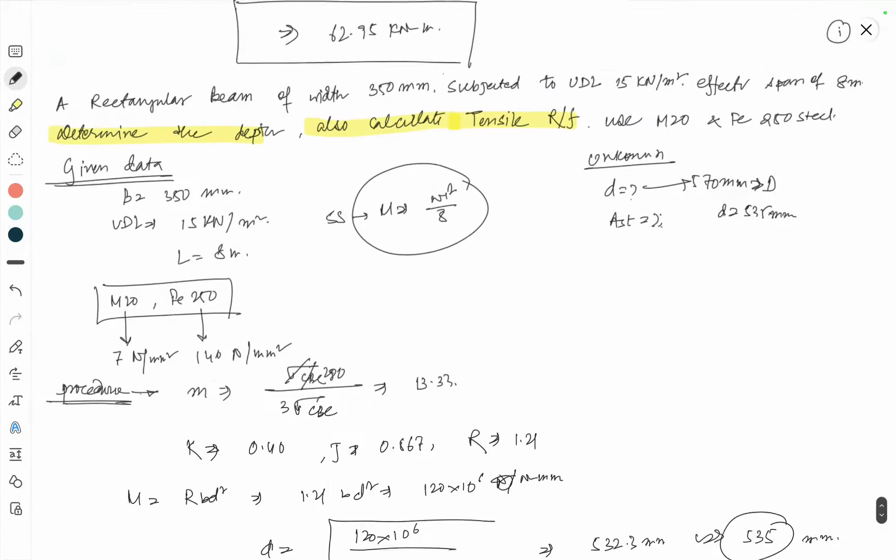From this video, we start shear and bond in our RCC member. In my last few videos, I tried to cover the beam design in WSM method. In case you missed this video, go to the RCC playlist section and find the last video.

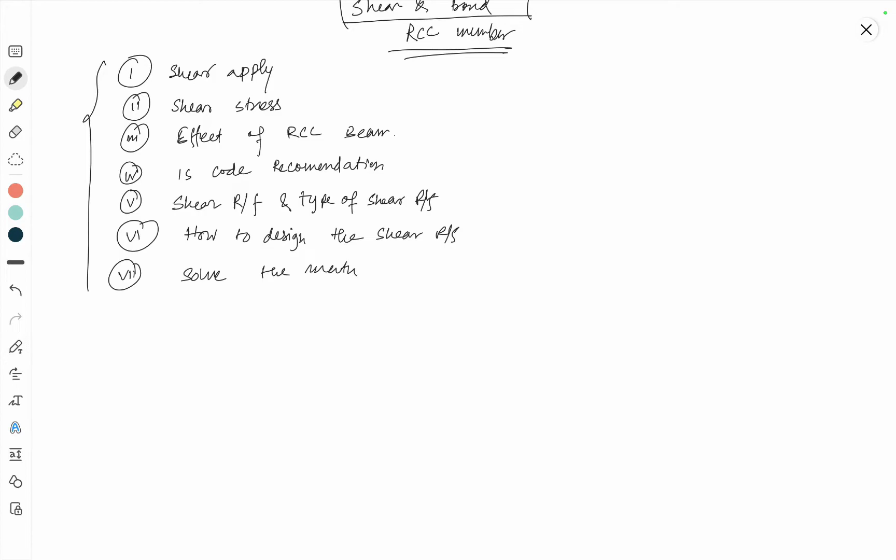So today I start the introduction. How shear comes or is introduced in the RCC beam, or RCC any kind of structure.

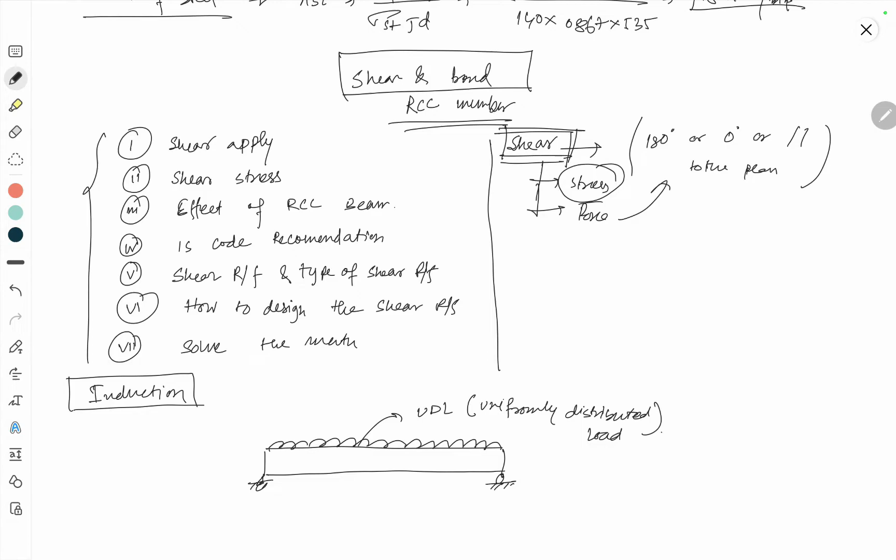So let's assume this is our simple beam. In practical scenario, all kind of force that is called UDL, sometimes UVL, but maximum times it is UDL, that is uniformly distributed load. But one thing I am telling you, what do you mean by shear? Shear means something that is 180 degree to the plane or 0 degree to the plane or parallel to the plane. It may be stress, it may be force. If it is stress, that is 180 degree or 0 degree or parallel to the plane. If it is force, then same, 180 degree or 0 degree or parallel to the plane of action.

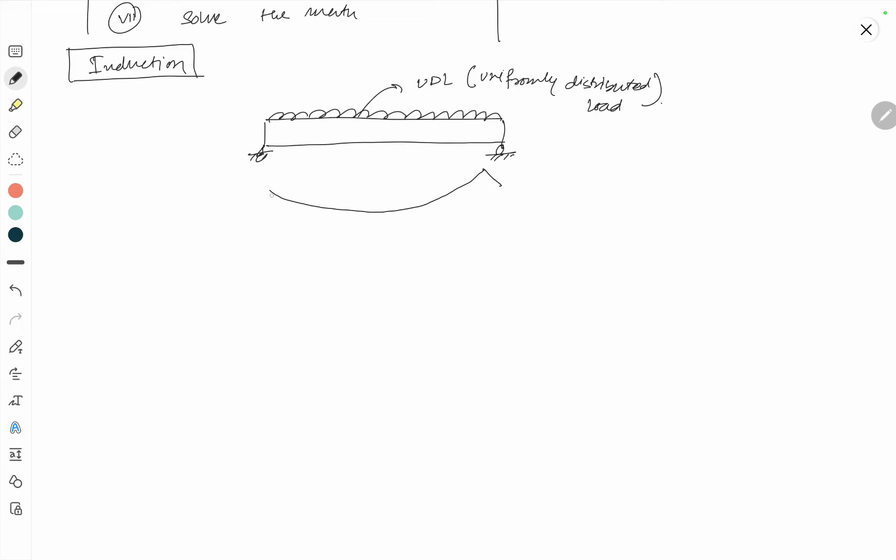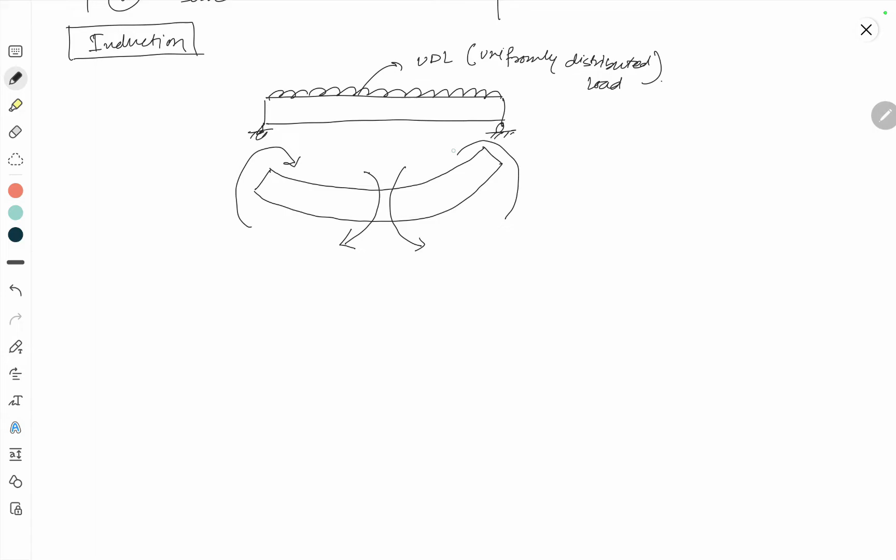So yeah, this is UDL. If this is UDL, then this is your deflection pattern. And if this is your deflection pattern, this is your bending pattern. So in this whole section, bending moment occurs. We know one thing, that dm by dx equals v.

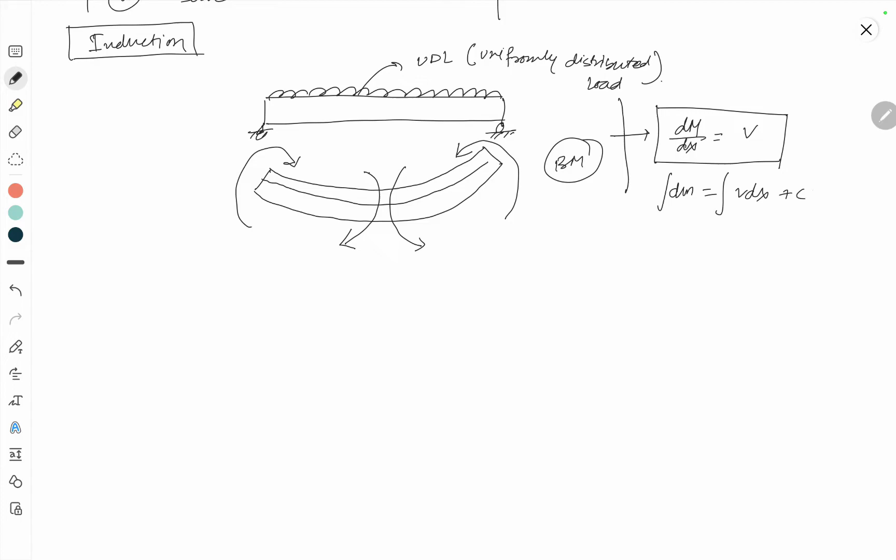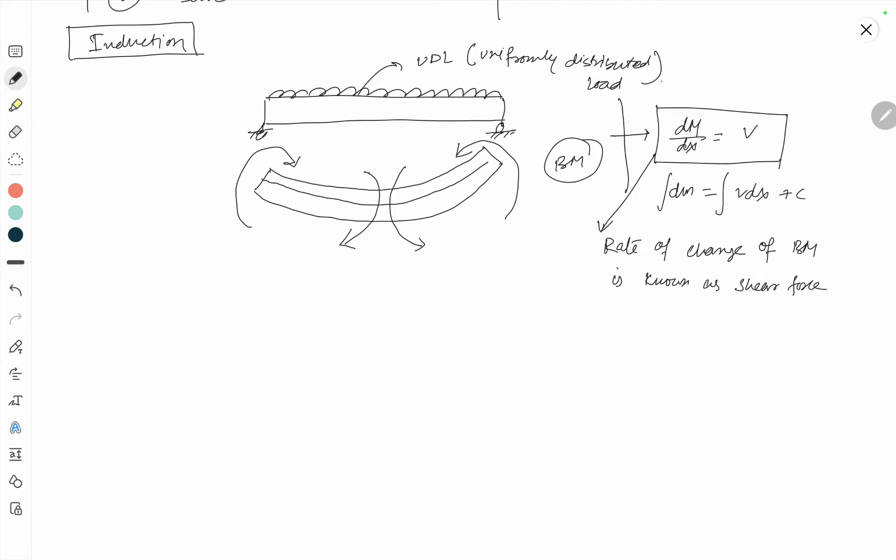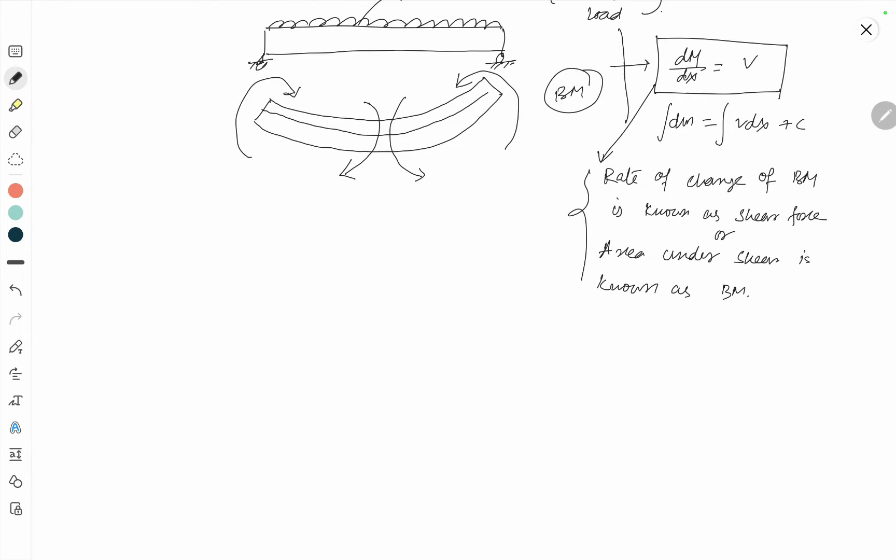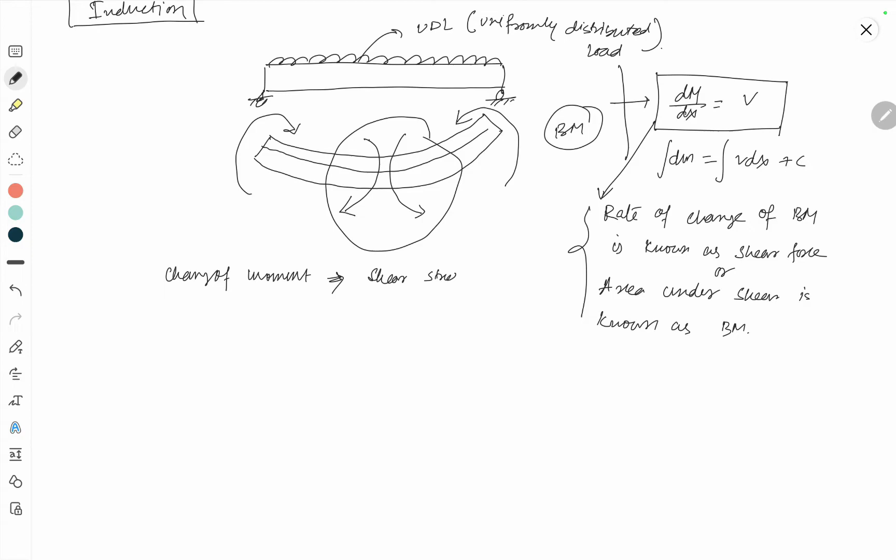That is a formula, dm by dx equal to v, and integrating, dm equal to v dx plus some constant. We knew this from our strength of materials chapter, shear force bending moment diagram. Rate of change of bending moment is known as shear force, or area under shear is known as bending moment. We know these two statements. So in every section there is a moment that will occur, and this moment is changing at every section. So in an RCC beam, change of moment at every section, from here shear stress or shear force is introduced.

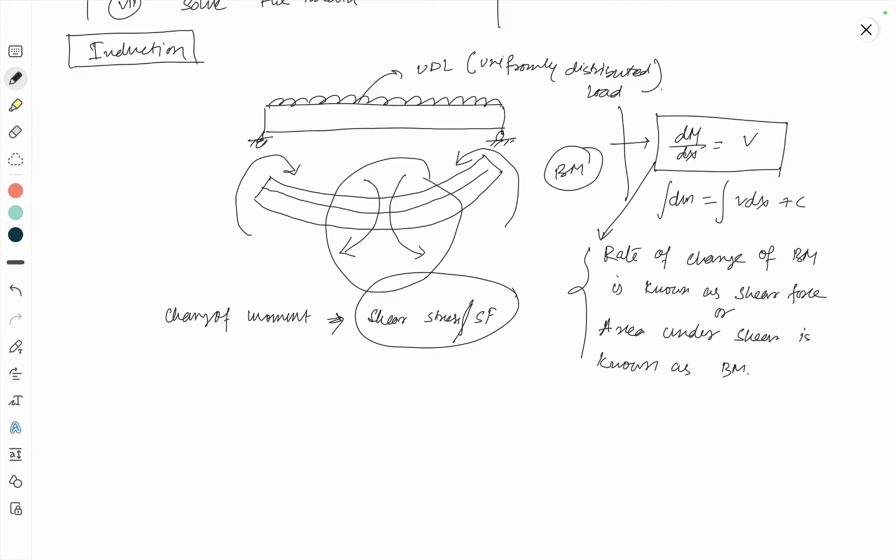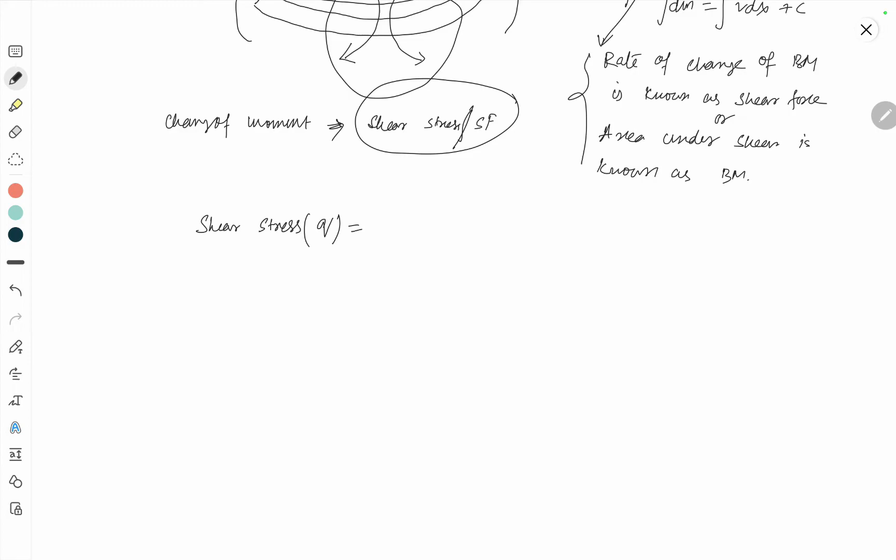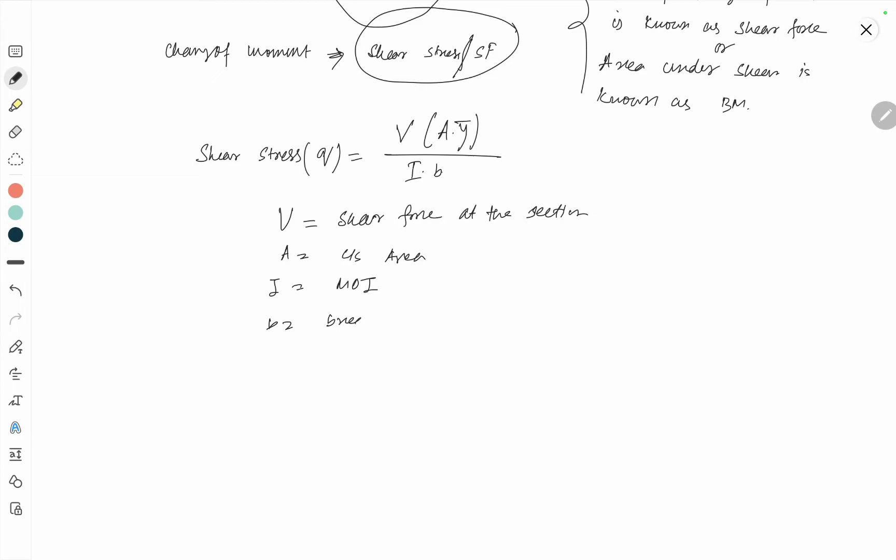Okay, so now if you come to the formula section, shear stress Q equals V into A y bar divided by I into B. Q equals your shear stress, V equals shear force at the section, A is the cross sectional area, I is the moment of inertia, B is your breadth, and y bar equals the distance to CG. What is A dot y bar? The first moment of area about the neutral axis, that is the first moment of area from the neutral axis.

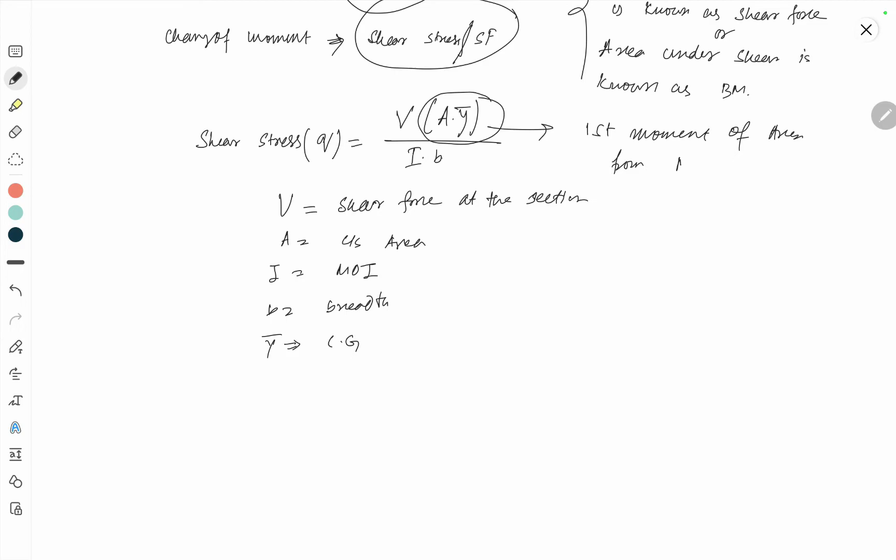That means if you draw a picture, suppose this is your cross section, this is your neutral axis. Suppose you find this section's shear stress, then what is the value of y? The y should be this. So this is your formula.

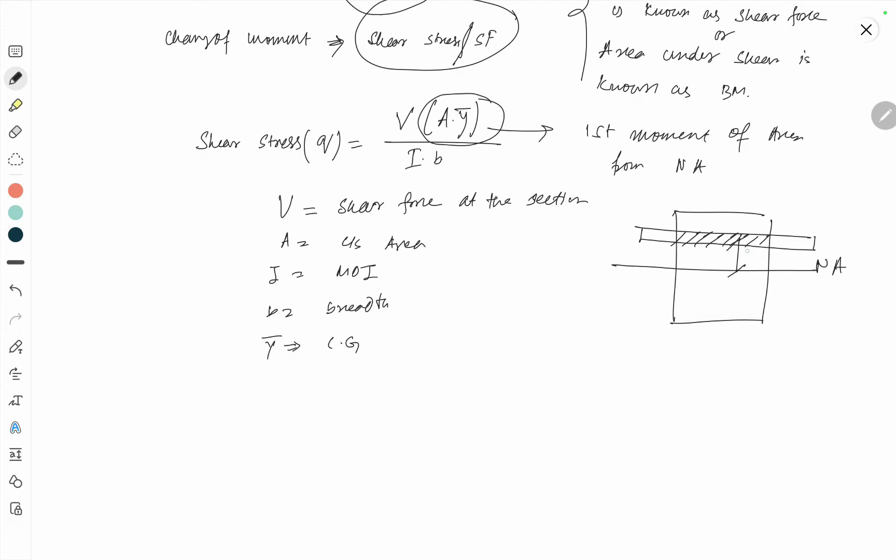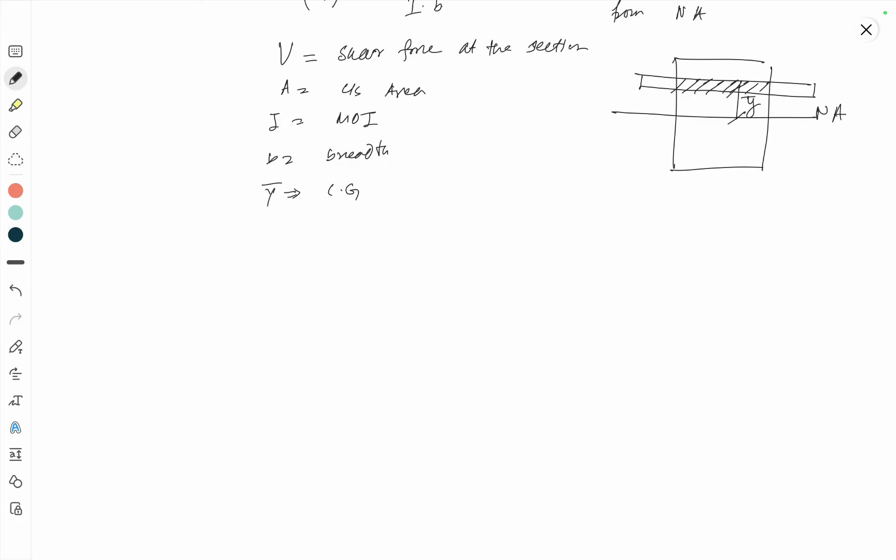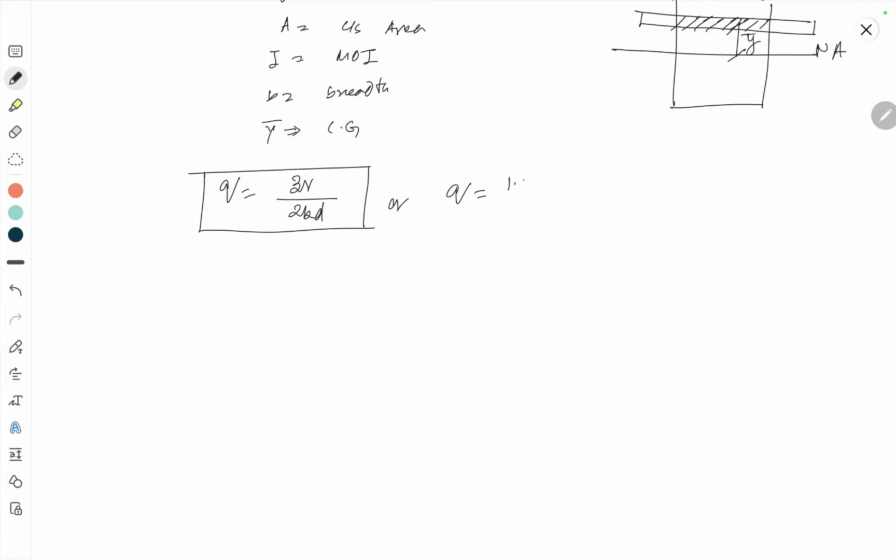But mostly when we start to design the shear in a beam, maximum times we follow a particular equation, that is Q equal to 3V by 2BD. Or sometimes you see Q equal to 1.5 V by BD. From here you can say tau equals 1.5 times tau average. From here you find some MCQ in any kind of exam.

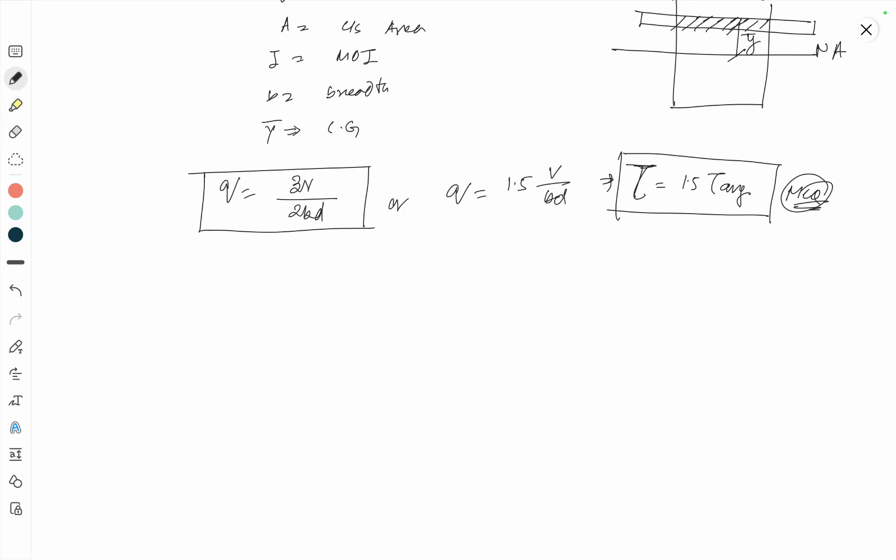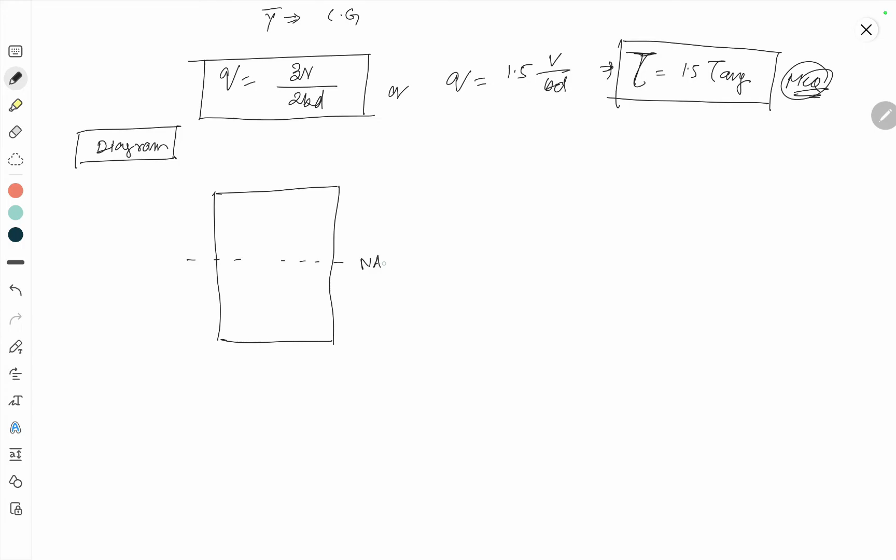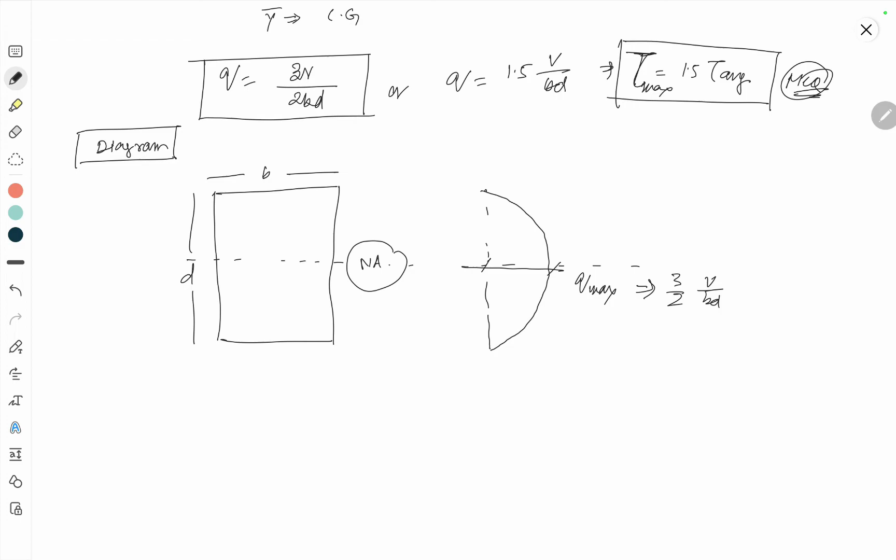Now if I share the diagram, what is your shear diagram? See, this is your cross section of a beam, this is your neutral axis, so your diagram should be like this. If this is your D, this is your B, then shear stress is maximum at the neutral axis, that is Q max. So where shear stress is maximum, this is the neutral axis. This is another MCQ, that Q max equals 3 by 2 V by BD, so that is tau max. From this diagram we can actually write this value. So yeah, this is your beam section and this is your shear stress diagram.

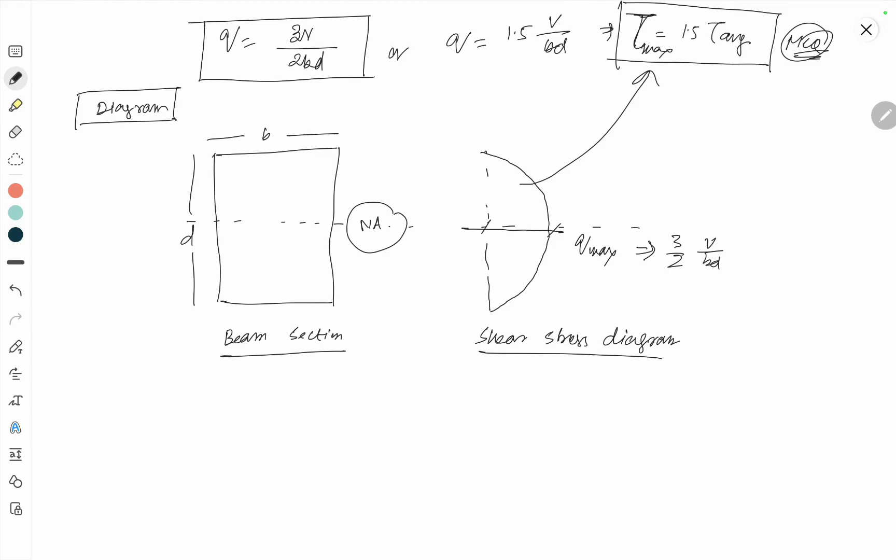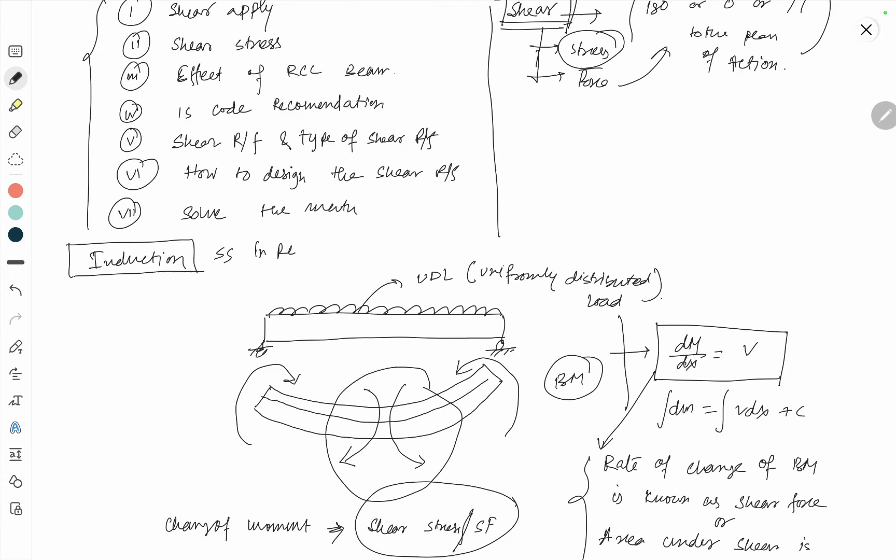So yeah, this is all about today's video, where I discussed the actual introduction part of shear stress in your RCC section, as well as shared the formula of shear stress, then I drew the diagram.